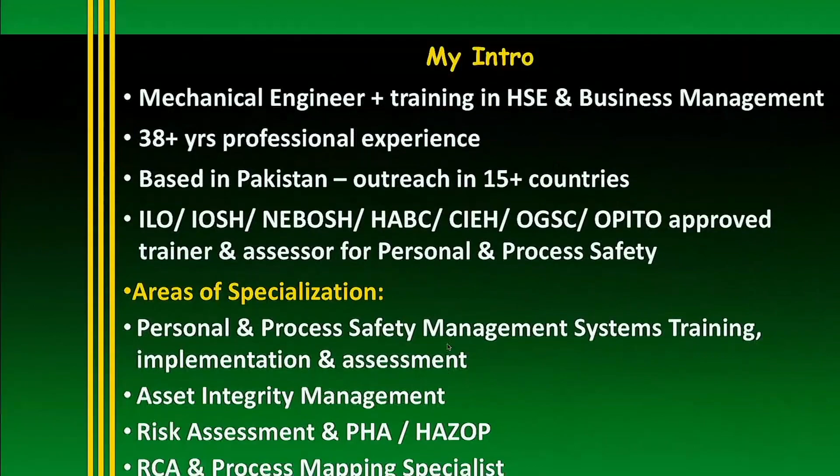The topic that we're discussing is process safety management, and I'll be talking about some challenges that the different companies are facing in implementing the process safety management systems, and also I'll be talking about some of the opportunities that exist by way of good implementation of process safety management system.

This is a brief introduction about myself. I'm basically a mechanical engineer, and I have had about 38 years of work experience. 38 years doing jobs initially, and then involved now in training and consultancy activities. I'm a certified assessor and approved trainer from various bodies in the areas of personal safety as well as process safety. And these are some of the areas in which we are providing services to various clients globally.

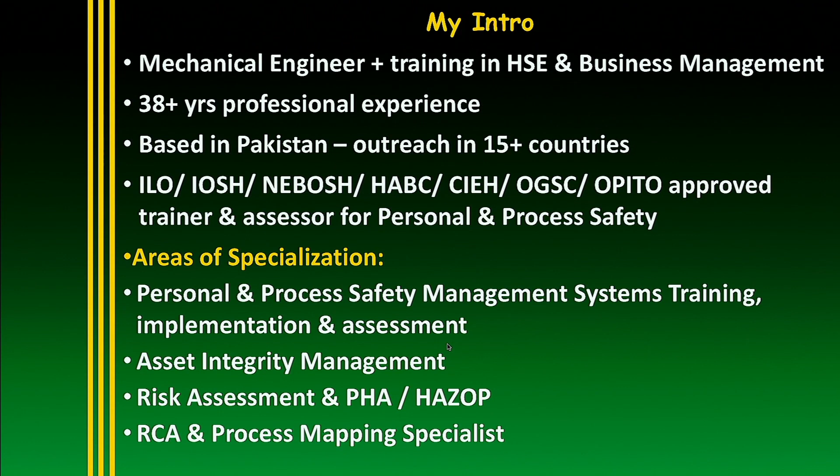This is the main topic of our session today. Hopefully at the end of the session, and at the end of the day also, obviously, I'll be requesting you to share your views, either your experiences, or if you have any questions related to the topic, or if you want to share your thoughts on whatever discussions we have today, okay? Please feel free to share those.

The agenda or the key discussion points: I'll be giving you a brief background, how the process safety management standard came about, what were the regulatory standards that were introduced, particularly in the USA, the OSHA 1910.119 standard. And there were some other models that were introduced by other companies like the DuPont process safety management system or the CCPS PSM model. I'll be briefly talking about those different models.

And then we'll move on to the actual areas that I want to talk about: the 5 major challenges in implementing an effective process safety management system; out of all the elements that are covered in process safety management, what are the 5 major weak areas that I consider based on my own experiences; 5 opportunities which we can use to develop good safety management systems in the process area; and finally 5 tips or success tools that I can share with you.

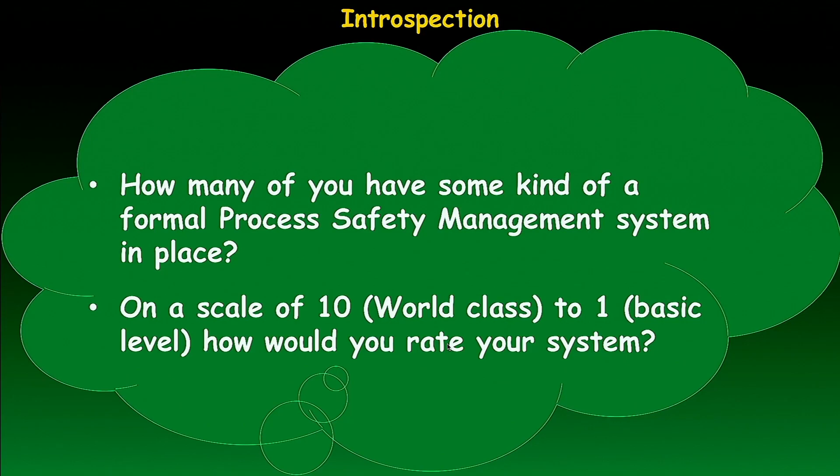Okay, so based on those incidents that I talked about, the Bhopal incident and the other incidents, in 1991, OSHA promulgated this standard, popularly known as the PSM, Process Safety Management Standard, 1910.119. Now, this was introduced in 1991.

Okay, what do you think? Is it still working? Has it really been able to reduce those kind of disasters that we talked about earlier, the Bhopal type, the Piper Alpha type, the Flixborough type incidents? Has it been successful in averting those kind of disasters? In other words, is it successful? Mm-hmm. It has probably reduced.

Because when you talk about the OSHA PSM standard, although it's a regulatory requirement in the US, in other countries it's not a regulatory requirement as such, but other countries are, by and large, following this as a kind of a voluntary thing. They consider it's a good thing and they want to follow it, not as a legal requirement, but as a good practice.

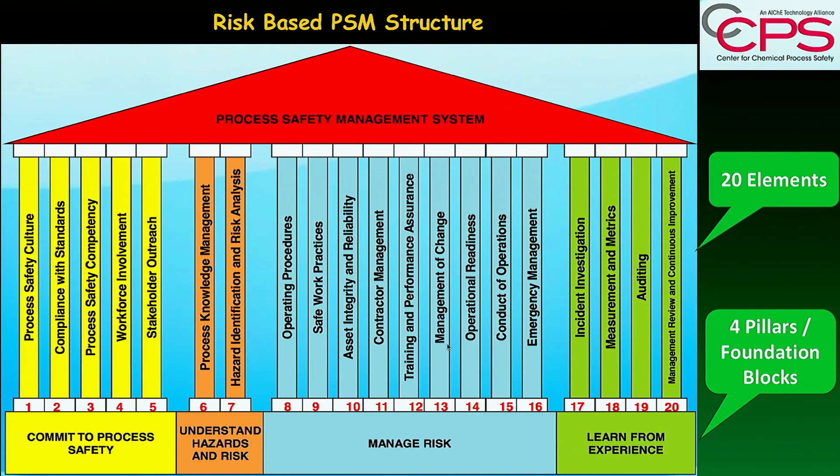Now, having discussed those different systems, in my opinion, and the opinion is based on, as I said, working with different companies, these are the 5 major challenges that I consider different companies have in relation to implementing a good safety management system. And based on your experiences, I would appreciate if you can either add or agree or disagree or ask any explanation or clarification on these. But this is what I have concluded based on my experiences.

These 5 areas are: inadequate leadership, understanding, and commitment. The senior-most leaders, and this has come out in various investigations, in the Texas refinery incident, the Baker report, the Mogford report, all have very clearly described the major cause as lack of understanding, lack of understanding about the requirements, lack of understanding about the implications of ignoring process safety management standards. Okay.

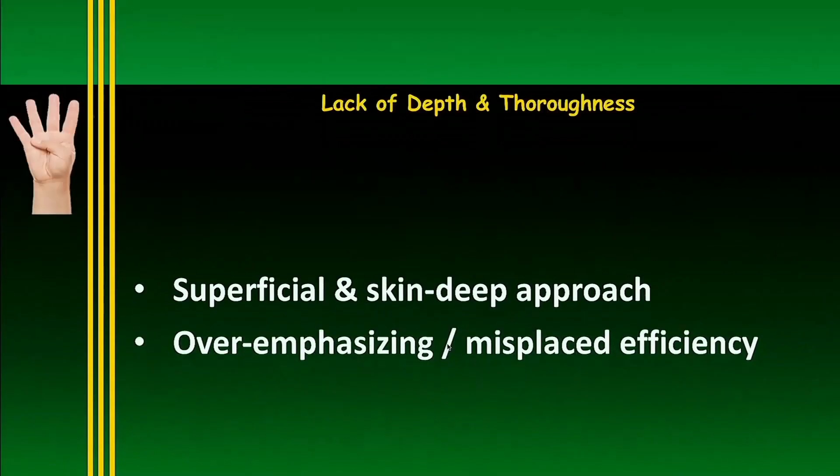Lack of depth and thoroughness. The approach adopted - and these were the exact words used in the Texas refinery incident, if you have read the Baker report - they had a checklist approach. This done? Yes, done. Finished? Yes, finished. So just putting in check marks and you think it's finished, done. That's kind of a superficial or skin-deep approach that they were following.

Now, when I say overemphasizing of misplaced efficiency, which means get it over with - we have to complete this element by, let's say, October 2019 - you just get over the things in a tick box manner. You just get it done, but the quality of that closure, the action closures, is missing.

Human factors and risk perceptions. Again, in this area, there's a lack of good quality safe operating procedures, work procedures. Sometimes, in my experience, I've seen procedures with contradictions between them - inter-procedural contradictions. I have also seen intra-procedure contradictions, within a procedure, where one section says this and another section says a completely contradictory thing to do.

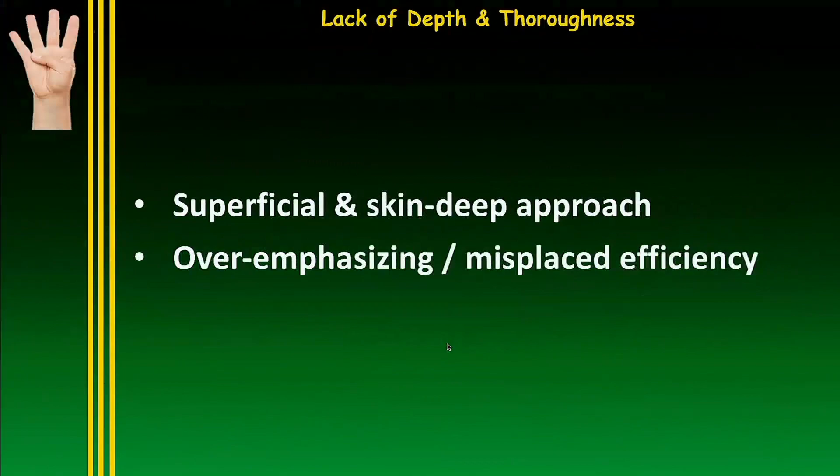Any other observation? Okay, then I'll move on to the specific elements of the PSM standard that I think are weak elements, in the sense that the application or implementation of these elements is lacking in some area. These are the 5 elements that I consider weak in implementation by different companies.

So these are the 5 weak elements that I consider: process hazard analysis, asset integrity and reliability, management of change, contractor safety management, and accident investigations and analyses, and learning from those incident investigations.

Now, in asset integrity, why I consider it a weak area is because most companies, when they have these asset integrity management systems—it's called mechanical integrity in the OSHA standard, but DuPont calls it asset integrity, and I personally prefer asset integrity as it covers a broader area.

But I've worked in very old plants, including an Exxon fertilizer plant, which was a vintage plant, and they were operating at 148% efficiency. So if you apply good engineering, good maintenance philosophies, and proper design modifications at the right time, you can have a plant run much longer than its design life and much more efficiently.

Okay, then the other area that I considered in this asset integrity management area - I said there's a great deal of focus on operation and maintenance, but even within this area, the operating and management systems, the inspection, preventive maintenance, and reliability-centered maintenance systems are inappropriate and inadequate.

We don't actually go into developing different strategies of maintenance. For a particular piece of equipment, you may consider breakdown maintenance as the best option. Why go for predictive maintenance if that's more expensive depending on the criticality of the equipment? So if you identify your safety critical equipment, and what is not safety or production critical, you can develop different maintenance or inspection strategies for your different classes of equipment.

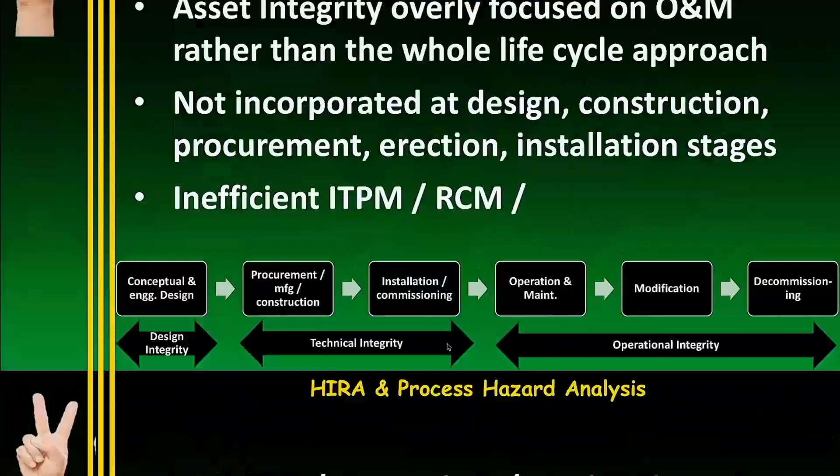I think the PHA covers everything except decommissioning - in terms of design, trying to figure out the what-ifs of what could happen before the plant is even built, I think PHAs cover that. But should cover that, yes - I won't say would cover that, should cover that. But that's its intent. Whether they apply it properly or not is another matter.

When you look at these disasters, there have been failures in this area, with companies like Chevron, BP, Exxon having had failures. I'm familiar with the Williams Olefin plant, which is right up the river. They actually did a follow-up PHA and said, oh, we have a problem here we need to fix. It got put on the back burner, didn't get fixed, and then it blew up.

So when I talk about this PHA, this is one of the problems - sometimes you don't do a good PHA itself. Sometimes you have a good PHA, you identify problems, you develop action plans, but then you don't implement those plans. Other priorities then supersede.

In the case of the Texas City Refinery, for example, there was a recommendation from one of the HIRA and PHA reviews that you need to have a stack for this excess fluid. They did not build that stack, but it was a recommendation in one of the earlier PHAs.

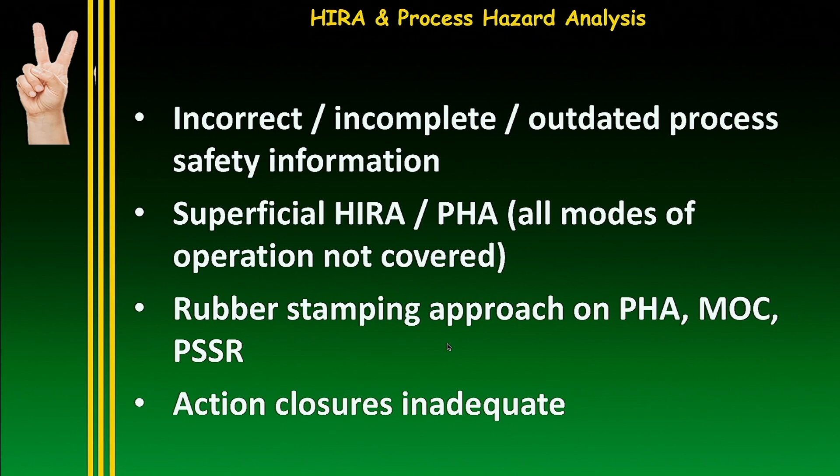Okay, another weak area is the management of change, and that's why probably DuPont has 3 MOC elements rather than 1 - maybe that could be a pointer. So these MOCs, management of change - you have a lot of changes going on in organizations, not only in the main design.

You change the processes, you change the equipment, you change the metallurgy, you change the materials, you change the type of valves. So there are so many different changes going on, but when applying the process of management of change to those changes, companies are by and large inconsistent. You may have an MOC process for a particular change, and for a very similar change at some other point in time, you may not do an MOC - the priorities could be different at that point in time.

Safety critical equipment - the thing I'm trying to point out here is you have safety critical equipment, and failure of that equipment could be critical. So even if you defer the planned or scheduled inspections or preventive maintenance activities on them, you are vulnerable to certain hazards, and you need to do an MOC for that.

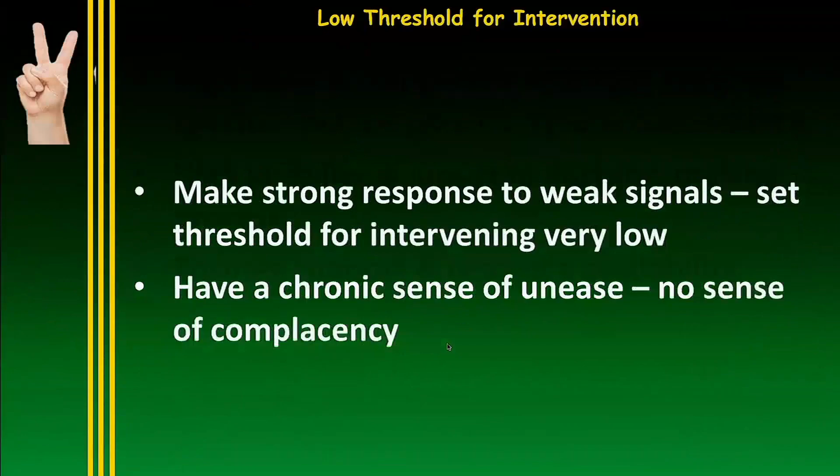Okay, so these are the 5 areas where we can build upon from each other. Okay. So these are the 4 areas that I talked about: the 5 major challenges, the 5 weakest elements, the 5 opportunities, and the 5 keys to success. Any questions, any comments, anything that you want to add to this?